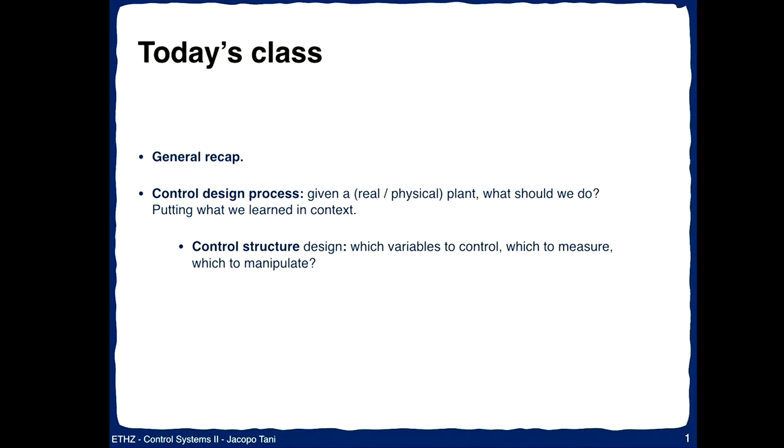So let's start from Adam and Eve. Every good story starts from the beginning. So what have we been doing in control systems? You started after dealing with the basics of math and physics and understanding your way around the basic language of this game. You started studying control systems in the Control Systems 1 class.

And in Control Systems 1, of course, the first stuff you saw was related to how we model systems, in particular how we do linear time invariant, single input, single output systems. You started looking at the fundamental topics of control systems, in particular how to play around with the different signals involved in a feedback control loop.

And you saw the importance of these frequency domain mappings between different signals, these transfer functions. You were told: this is how you derive the transfer functions, this is what they mean, and look at how many interesting properties of the closed loop you can extract from these, from analyzing poles and zeros of specific transfer functions.

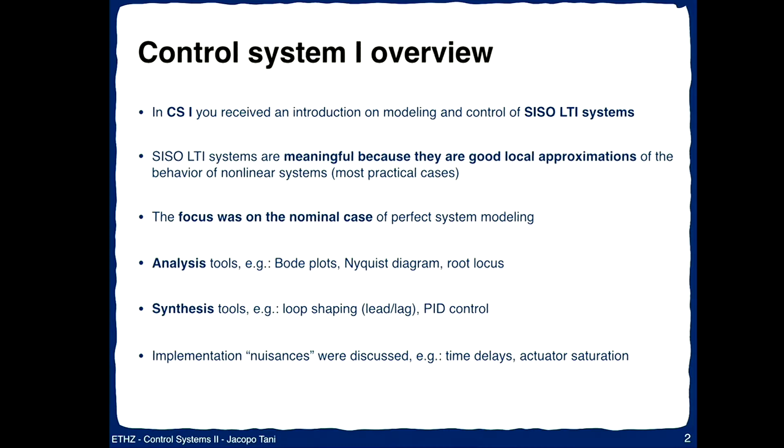And then you were introduced to concepts described as nuisances - things related to implementation. So how do you deal with actually transposing all these concepts that we've learned onto our computer? How do you deal with the natural latencies or time delays that come either from the process or from the implementation? And other things like when you have saturation of actuators, if there are ways to avoid that, like anti-wind-up schemes. So in control systems two, we stepped it a little bit further.

So now we knew what was going on at a fundamental level, and we moved in a couple different directions mainly. First, we extended the domain of analysis, no longer to single input, single output linear time invariant systems, but to MIMO systems - multi-input, multi-output, always linear time invariant systems. It's critical to remember that we're always dealing with linear time invariant systems.

And the other direction we moved in was that of uncertainty. In practical situations, it's actually very tough to know what the model of the plant or process you want to control is, and this is more true the more complex the plant becomes. So when you study MIMO systems, you reasonably think of a more complex plant because you have more channels, more sensors, more actuators, more things going on. And having a reliable mapping between all these inputs and outputs - the transfer function matrix of MIMO systems - is a little bit more complicated.

So in face of this uncertainty, which can be modeled in many different ways - nobody really knows the best way to do it given a specific circumstance, but there are many different uncertainty parameterizations - we introduced this concept and looked a little more in detail at the concept of robustness. So the concept of robustness is: if I design a controller for a nominal plant, will it still work for the perturbed plant, for the uncertain plant? When you have uncertainty, you don't really base your design on one plant, you base it on a family of plants. So how do we deal with guaranteeing stability and performance, the two most important things at the end of the day, when you have this family of plants?

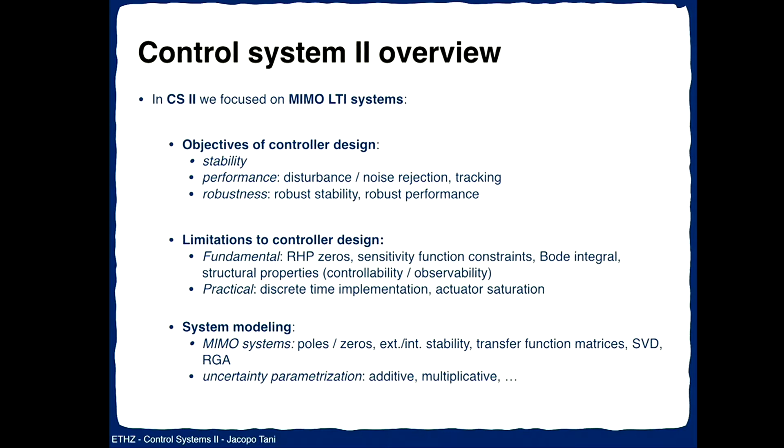And these interactions, there are many ways to characterize them. We introduced some fundamental ways to measure these interactions that we call the relative gain array, and through that we understood that we could have a first hint in which direction to move to go towards synthesizing, for example, a controller.

But before doing that, we went through the usual scheme that we did in Control Systems 1 as well, and we looked at: okay, what does it mean for a MIMO system to have a stable or a performant behavior? How do we analyze this behavior? And we introduced a number of tools, similar to the ones we used in Control Systems 1, in the sense that they eventually go and evaluate and measure the same concepts.

Now, it's all about the sensitivity functions and how the different signals in the loop relate to each other. It's only that when you do MIMO systems, you have more signals, and these signals are a little bit less straightforward. So we had to introduce some different tools like the small gain theorem or these Lyapunov functions to evaluate stability. We had to factor in robustness in some way that might not have been so straightforward.

When we did it, we talked about structured singular values, or these mu parameters, that go and measure how much the uncertainty on the different channels affects the performance of a system.

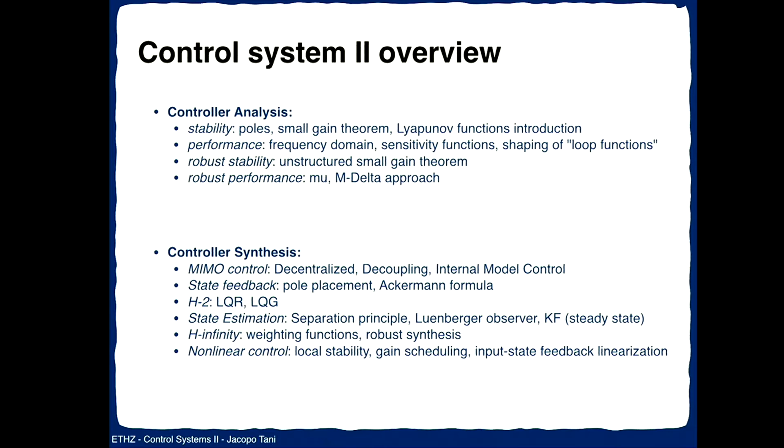In particular, I think a very powerful idea for nonlinear systems is that it always follows the same concept: when you deal with a new problem, the first thing you should try is to reconduce it to an old one. And we saw this concept of feedback linearization, in which, through some particular transformations of the inputs and outputs, you can actually create an inner loop in a nonlinear system that provides a linearized behavior between inputs and outputs without doing any approximation.

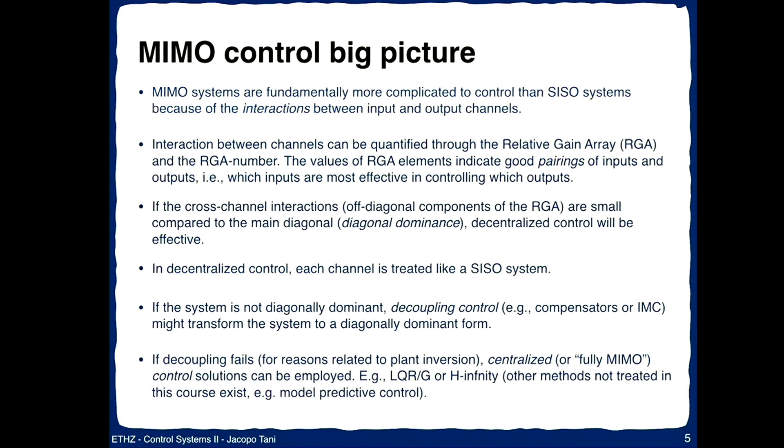And that was really, really nice. So I pretty much talked about all of this already. A quick recap on a little bit more the math.

So what was an LQR? An LQR was based on this idea of creating a cost function. If we have a cost function, we can put whatever we want in it, but we weight different terms. In the regulation problem, which is that of following a zero reference signal, we just look at the controlled outputs that are different from the measured outputs.

Remember that sometimes you get to measure things because of the physical constraints of a system. You have some sensors that you can place only in specific places, and you measure what you measure. But your interest might be different. What you want to control as a designer might not be exactly what you measure. So there's this distinction to be made between the controlled outputs and the measured outputs. And then the input effort is always important.

So why is a linear quadratic regulator powerful? Because, of course, it's optimal in the sense of the cost function.

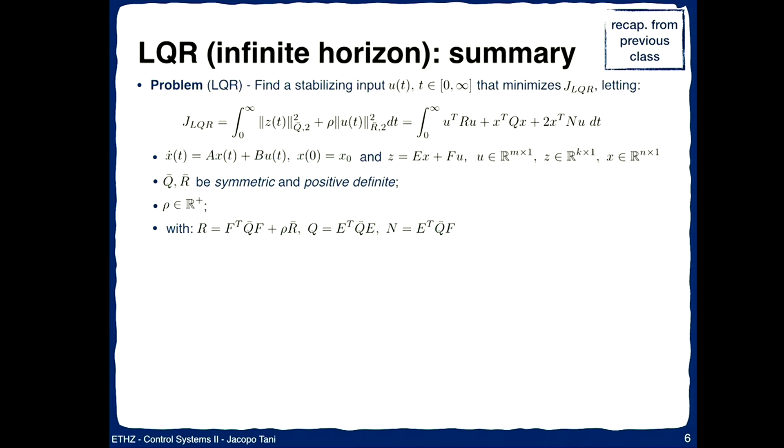We noticed that, additionally, under some simplifying assumptions, this robustness condition holds when one of the terms of the cost function is considered to be zero, that of the mutual interaction between the states and the inputs. In particular, this x transpose n u term here. It's considered always a wise design choice to put that n to zero, so to gain this guarantee on the robustness.

Of course, this desirable property of this LQR approach is that it's easy to tune. It's very similar to PID. Now you have your two knobs, you just play around with them. The designer doesn't really need to worry about if the outcome is something that will send your system unstable, because stability is guaranteed, and so it's a fun approach.

But the problem of the LQR, as I mentioned before, is that of the state. We do not simply have it, it's a very theoretically nice story, but it's not implementable unless we are lucky enough to be controlling a system where we measure actually the states, which is absolutely not the case in general.

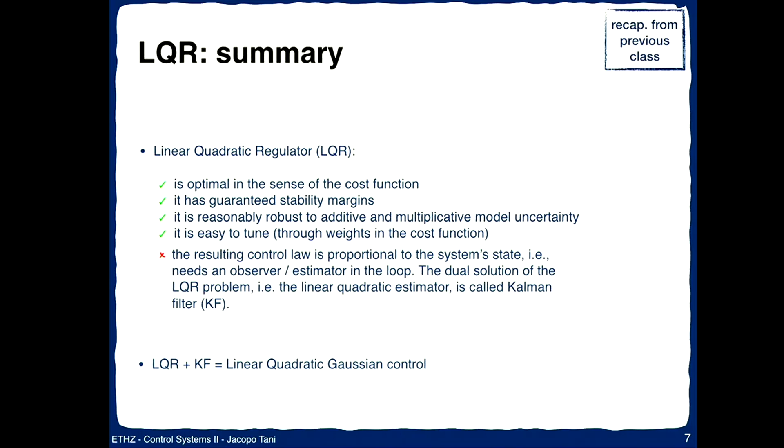So we introduced this concept of estimation. We looked at the first important class of estimators, the so-called Luenberger observers. We mentioned that an observer and estimator are pretty much the same thing. The estimation problem is, in general, a little bit more broad in the sense that the fundamental idea of the problem is...

Let's suppose we have the knowledge of a model of a system. Let's suppose we have the history of the measurements and the inputs. Can we reconstruct the states?

And the question is, can we reconstruct the states when? Do you want the states now at this specific time instant? Do you want the states in the past? Do you want the states in the future? So depending on how you change this detail of the problem formulation, you'll find terminology related to smoothing, if the states you're interested in are the ones in the past, to prediction, if the states you're interested in are the ones in the future, or estimate or filtering, as they're called, if what you want is the states at this current time instant, which is the case of interest to us.

So an observer or a filter are synonyms, and loosely speaking, when you say an estimator, you mean a filter, although estimation technically is a broader term.

So what was the idea of the Luenberger observer? The idea of the Luenberger observer was we need to find the states, we need to find them on the fly, and we create a numerical copy of the system. So what does that mean? It means we just say, because we're sure of the knowledge of the system model, that's a very critical assumption.

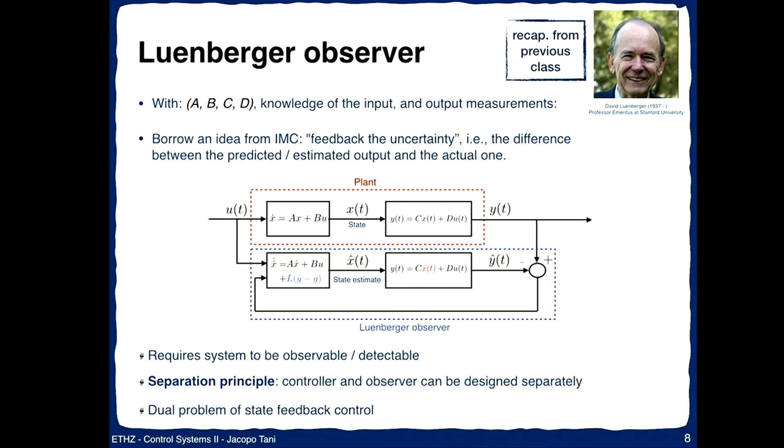So now that we understood there was a way to estimate the state of the systems, how does this fit into fixing our problem with the linear quadratic regulator? How can we use this optimization-based problem formulation, but plugging in a state estimator as well?

By solving the dual problem of linear quadratic regulation, instead of doing a least squares based approach on the control side of things, we did a least squares based approach on the estimation side of things. We found that the optimal solution for estimating a state under some specific conditions, a linear time invariant system with special noise distributions - process and measurement noise that have to be Gaussian and zero mean - the best possible solution you can get under these common, easily verified assumptions is this machinery called the Kalman filter.

We by no means had the opportunity to delve into the actual details of Kalman filters. Kalman filters are one of the strongest possible results of estimation theory, control system theory. They work in practice, they're beautiful. We could do a course only based on that - there are actually courses based only on that, and variations on the theme. I strongly recommend you study Kalman filters in detail, and in general recursive estimation, as you move forward with your studies, because it's an invaluable tool to get things to work.

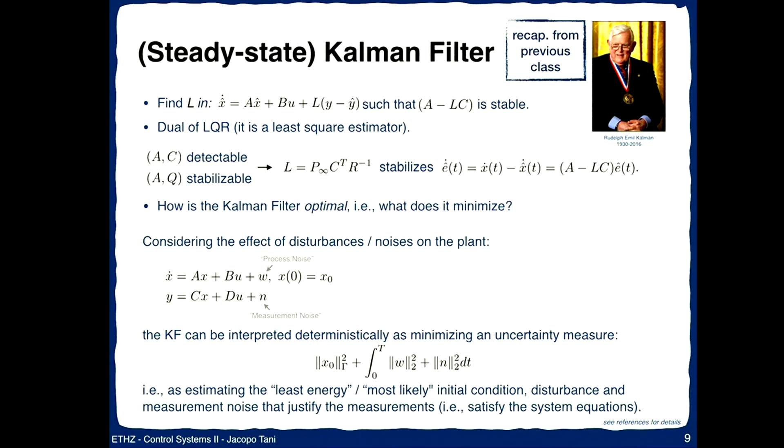So finally, having this regulator, this nice implementable estimator that is even optimal in the sense that it finds the best possible estimate given these assumptions we've mentioned, we can plug it into the linear quadratic regulator implementation, and what do we get? We get the LQG, the linear quadratic Gaussian regulator.

It's linear because it deals with a linear time invariant system. It's quadratic because it solves a cost function that is quadratic. It's Gaussian because Gaussian are the assumptions we're making on the noises that act on the system. So by just putting together these two things, we get LQG.

It's just an LQR in parallel with a Kalman filter. The separation principle applies in the same way. Beautiful, elegant solution. We can design the two things independently, and a Kalman filter is basically a Luenberger observer, has the same structure. It's just that the gain that multiplies the uncertainty fed back to it is different, and it has a specific formulation.

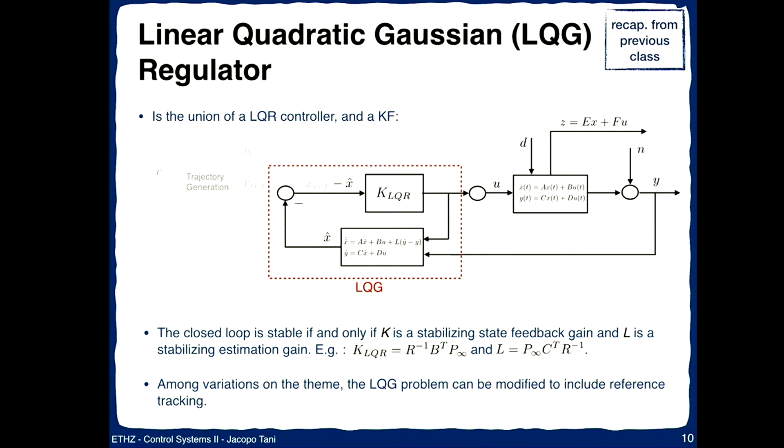I would like to stress, as I did in the notation here, that we talked about the infinite horizon problem. So we just pretended everything was going at steady state, which is the easiest way to deal with the problem. But the big power of these filters is that this whole problem could be posed in a different way, such that the gains are time variant. So at every time instant, you update your gains to get an even better behavior. In order to do that, there are fancy numerical considerations that have to be done. You'll see them in the future, but just keep in mind that this is the easiest way to formulate the problem. It shows what are the key ideas behind it.

So in summary, what can we say about the linear quadratic Gaussian regulator? It's very nice in the sense that it provides, again, an optimal solution. It's implementable in the sense that it automatically generates the information necessary to have this state feedback control.

But the funny thing was that although the linear quadratic regulator on its own was beautiful in the sense it provided great stability margins, and the Kalman filter itself on its own, since it's basically the same thing as a linear quadratic regulator but the dual problem on the estimation side, provides beautiful robustness margins, if you put them together, it turns out that you cannot guarantee robustness. There is no way to prove that if you do something in particular, you'll guaranteed obtain robustness of your controller. And this is not always a problem, in the sense that it might very well work. But in some circumstances, it's a huge deal.

So two things to say here. First, if you ever design an LQG and want to actually use it in your life, test it before you use it. Design it, test it in a pilot plant, in numerical simulations, whatever you want. Perturb the plant as much as you want and understand what the bounds of the functionalities are, and then finally use it.

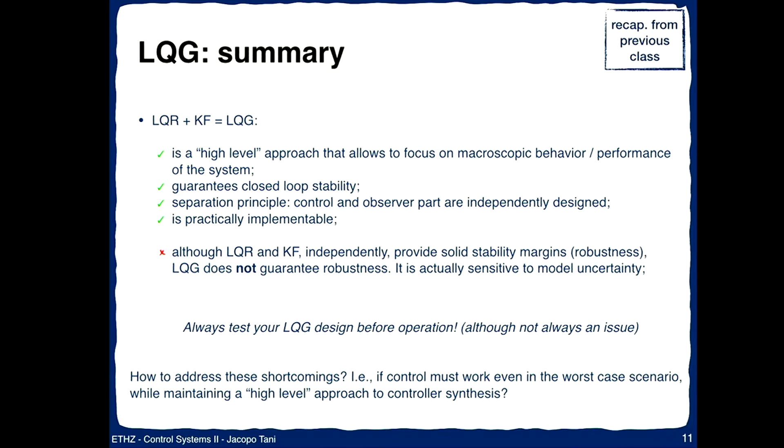So dealing with model uncertainty is a fundamental problem that needs to be addressed. So we asked ourselves, is there a similar mechanism, a similar approach to designing a controller that allows us to focus always on the big picture without delving too much into the weeds of the design process, but at the same time can guarantee robustness of the control system under all possible circumstances, under all possible plants that belong to the uncertainty set. Claudio talked to you about this idea of H infinity control, where the infinity comes from the idea that we're basically solving the same, or at least the framework for the problem formulation is the same as for the LQG. We have a cost function, we have something we want to minimize, and the result just comes out of this minimization approach. But instead of using two norms in the cost function, we use infinity norms.

And we've seen that infinity norms represent the maximum possible value of the biggest singular value of a transfer function over all the frequency domain, right? So we know that singular values are the equivalent, the concept of gain, basically, for a specific input-output direction. And we know that these gains are important to be kept under specific bounds in order to guarantee, for example, stability and performance of a system. And therefore, having a minimization-based approach that relies on evaluating infinity norms of some quantities guarantees that worst-case scenarios are met.

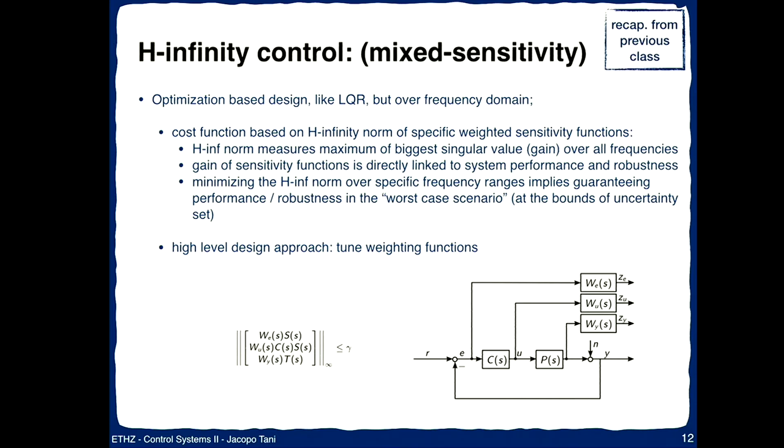So again, the H infinity problem has many variations. The problem can be set in different ways. We looked at the so-called weighted mixed sensitivity approach, where the cost function is the infinity norm of a transfer function that includes different sensitivity functions of the closed loop that are weighted in particular ways. So instead of having the weights as we had before in the time domain in the two-norm cost function, now we have these weighting functions in the frequency domain that are used to shape the sensitivity functions in desirable ways in order to obtain performances and robust stability and robust performance for a system.

So H infinity control works in practice, is based on the same framework of H2 control, so it's based on the same framework of the LQR. It's nice because it's based on, at least the formulation that we presented, recalls a lot of the classical ideas of control, of loop shaping. So it's understandable what is going on. But at the same time, the machinery that goes on behind it, the mathematical passages, are not straightforward. So it's to be treated often as a black box, and one needs to rely on the computer implementation.

So if you remember at the first class, when we showed the Bode integrals, we said, look, at the end of the day, all control systems could be seen as shaping the sensitivity function, taking dirt away from some specific frequency ranges and applying it somewhere else. And these were like old ideas in controls, right? So we went through all this process, through decades of research and then crazy math and stuff, and where did we get to? We got to basically the same thing, but now we're using a very formal synthesis machinery to do the same thing as we were doing before, okay?

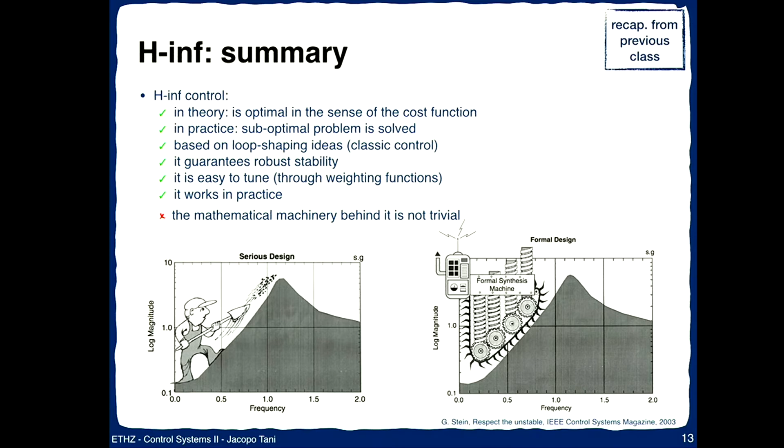It's one of the things you need to be careful of, okay? Math is nice, it's very important, it's beautiful to do proofs. At least it is for me, I guess, maybe not for all of you. But it's important for a control system engineer to remember that the final objective is controlling a physical plant. And it's important to remember that although control systems are not maybe the most shiny of disciplines, with respect to other engineering, like mechanical engineering or aerospace engineering, things like this, you don't get rockets. Nothing would work without control systems, okay? It's like the secret technology behind everything. And if a control system doesn't work, bad things happen. Things explode, people die, bridges fall, shuttles explode, things like this, okay? So it's really, really important, like an act of responsibility, to make sure that you have a feeling with the physical plant and you ensure that the physical system actually works.

So, okay, we did maybe a little bit too long of an introduction on what have we done until now. This was the part where I wanted to address your questions, but since I didn't get many, I'll just go about and say, well, very nice.

We have all of this knowledge now. What are we going to do with it? How does it fit in the bigger picture? So let's say I come to you and give you a plant, a physical system that I want you to design a controller for. How does the whole control design process work? How do the analysis, synthesis, and modeling we've been talking about fit into the control design process?

Suppose you're given a plant. There is a standardized procedure. The first thing you want to do is have a preliminary analysis of your plant and understand what your control objectives are, what the obvious limitations are, and what the objectives are that you want to reach.

The second step is modeling. We haven't stressed modeling a lot in this class, there are specific courses dedicated to system modeling. We've seen that there are different approaches to modeling a system. All models are wrong, in the sense that models are by definition a simplification of reality. And that's good, because as engineers we care to focus on specific aspects, not to describe the truth, whatever that is, of what is actually going on. We want something useful to achieve our goals, previously defined as control objectives.

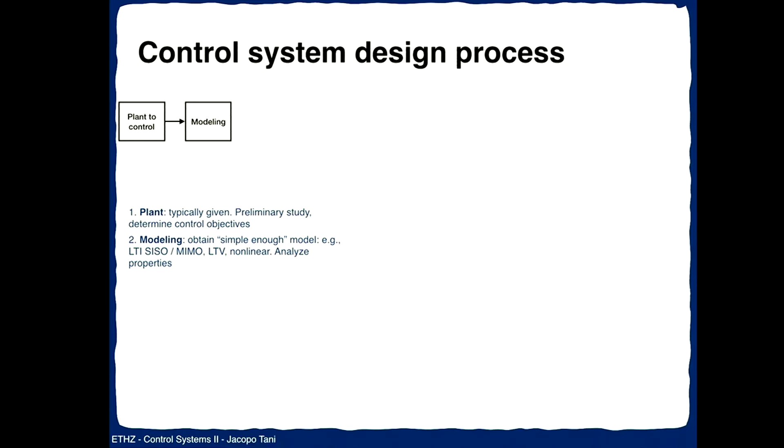So once we have a satisfying model, or what we think is a satisfying model of our system, we can move forward and talk about the control structure. The control structure is about choosing things that we always assume are given.

Now, when you solve your exercises, you're told, take this plant, x dot equals Ax plus Bu. But who chose what is U? Who chose what is Y? Y is the measurement, the one represented by the specific exercise given to you.

If you as an engineer need to handle a plant, you have probably some degree of freedom in deciding which are the measured outputs, which are the controlled outputs, what are the inputs. It really depends on practical things. You have actuators, you have sensors. The sensors you have available, what can they measure? Maybe they can't measure exactly what you want.

Maybe you can choose, maybe you can put a camera instead. Say your control objective is to control the temperature in a room. We could put a thermometer at the center of the room, or an infrared camera at the corner of the room. They both measure temperature, but they're very different. So the process of choosing the best outputs and inputs for a system is not to be taken for granted. There's something to say about this, and we will talk about it a little bit later.

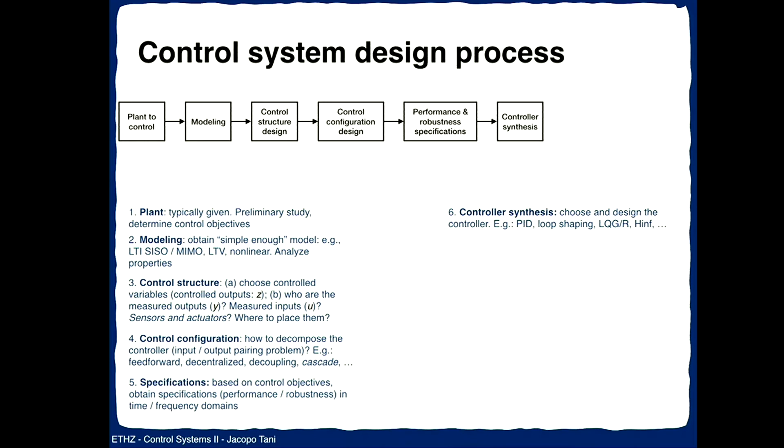And at this point is where you get to choose: do you want to use PID? LQR? Loop shaping with lead-lag networks? A crazy H-infinity control? Model predictive control? Or one of the other 172 control approaches we never even mentioned in this class, and probably you'll never hear of unless you have a career specifically on those things. There are really many different kinds of control solutions that can be used.

So once we've chosen the type of controller and designed it to meet the specifications, the analysis part kicks in. The analysis part was the whole first half of the course. Now we finally have a model of the plant, we finally have a controller—let's check if the specifications are met.

What if they're not met? What if we design our controller with LQG and everything should be fine, but then we try it and it's not robust—it doesn't work across the full spectrum of cases we care about? In that case you have to go back either to your performance specifications or your controller design and reiterate until you're happy. Then you move on and ask, are we ready to go?

No way. The next step is to take this controller you've designed and simulate it—simulate the behavior of the operation. How do you simulate stuff? Either on a computer, or you build a pilot plant and test it there. We have not touched at all on the simulation part of things.

Just a couple words of caution. Simulations are when you basically write a computer program that tries to replicate the model and everything—you can think about MATLAB or Simulink as good tools to do this, but there are plenty of other ones.

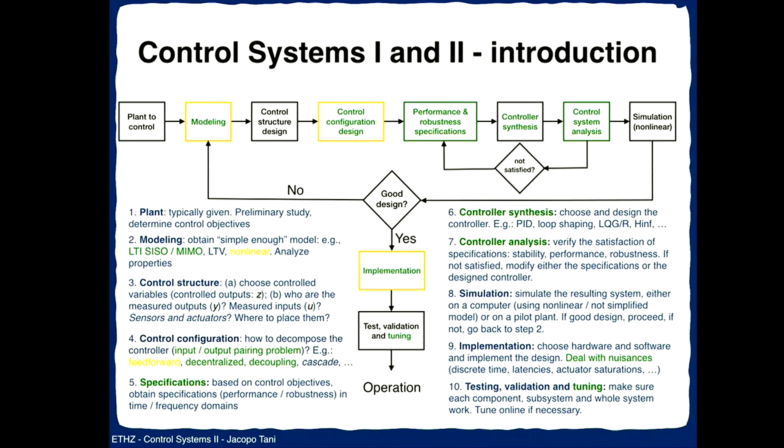So now I will just give you a little bit of an intuition about how to go through the control structure design. So the fundamental question that we're going to address is: how do you choose the control variables?

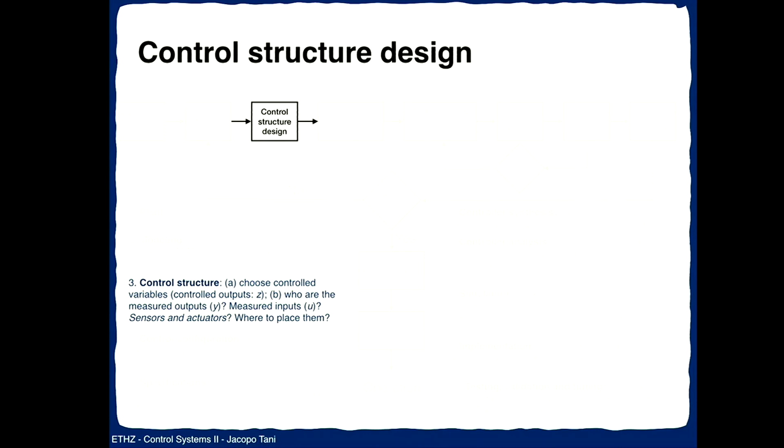How do you choose the measured outputs? And how do you choose the measured inputs? And of course, we won't have time to go into the sensors and actuators because that's another course.

So what is a control variable? A control variable is something that you want to follow a reference trajectory. At the very beginning of this whole process, you decided what your control objectives were, what your final objective, what your task that the system has to follow is.

Up to now, in all the loops that we've designed, you might recognize this. This is the first time that we write the control loop that you've seen a million times up to this point without equations, so it might not look familiar, but it's the same exact thing we've been doing. It's the control, the plant, the feedback, and we understood that we pretty much always want an estimation, a perception module in.

So by the way, I used the bar here to indicate alternative terminology that you might find. The more you go forward, especially in the field of robotics, they tend to use the second word to describe what we use the first word for. So instead of estimation, they would call it perception. Instead of inputs, they would call it commands. Instead of estimate, they would call it a belief. But they're fundamentally the same things.

And we always assumed that the reference signal was given, right? But is that really practical? Imagine a real problem: you have an autonomous car and you're driving it in a city. What's the reference signal? What do you mean about reference signal? It changes, the environment changes. You have to drive, maybe there is a pedestrian crossing the road, there's this and that happening - it's a dynamic process. So the reference by no means can be known before you even start the whole process, right? It cannot be known a priori.

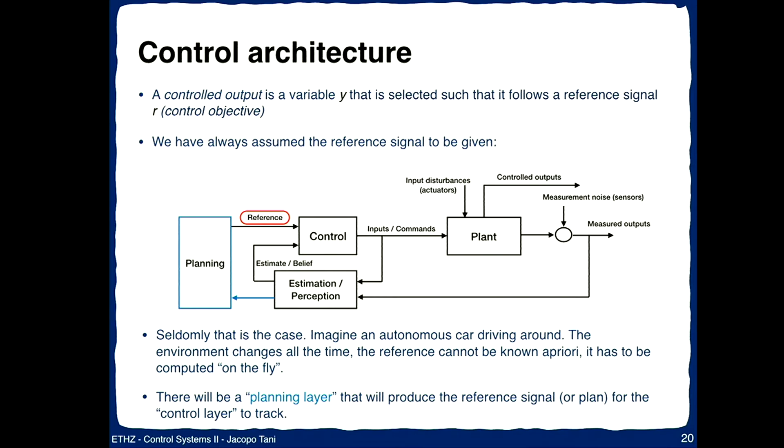And the other layer, which is the one we've been studying in the last two courses, which is the control layer, has really just the task to implement what is the decision-making process of the planner.

And just to give you an idea, when are reference signals easy and when are they less easy? Try to imagine this is a cruise control kind of system. Here it's the easy case - your reference signal is basically go straight, just stay in the lane. That's relatively straightforward.

Now look at this - we are moving in a cluttered, uncertain environment. We have cars parked on the side of the road, we have people crossing the road, we have kids that could start running across the road at any time. It's a much more messy situation. So how do you decide on the fly what is the reference signal that your controller layer should actually implement? Of course, we will not go into details of this because...

Question? Yes, out of curiosity, that on the right, is that already an autonomous vehicle? Yes, yes, and this is, of course, all computer vision based.

The intermediate steps are that you start identifying what different objects are, so you put bounding boxes around them. The red boxes might be obstacles you want to completely avoid, so the reference signal has to be defined on the fly in such a way that you avoid hitting other cars or other people. The green boxes might represent instead information that is useful to you, signals you have to understand that restrict your domain of possibilities - for example, if there is a no right turn sign, it means you can't turn right, something like this. And the green represents just the field of view of the specific sensor.

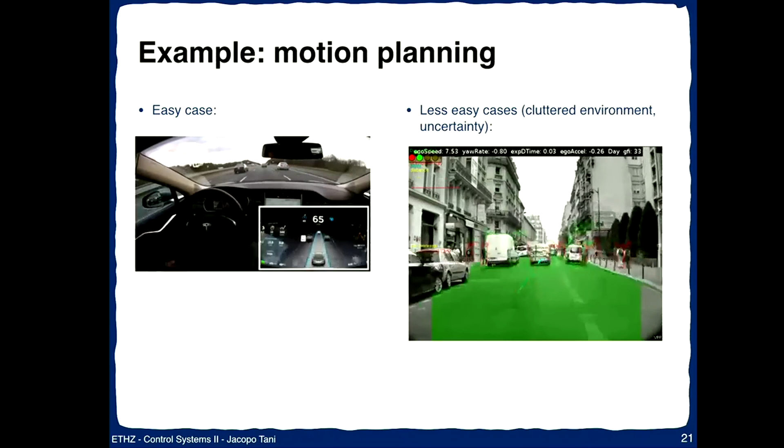This, of course, is some vision-based stuff, but I wouldn't be surprised if there's LiDARs and other sensors involved in the process as well. So without going too much into detail, this is something you'll have a lot of opportunity to get your hands dirty with if you follow, for example, the Duckietown course, Autonomous Mobility on Demand, happening next semester at master level.

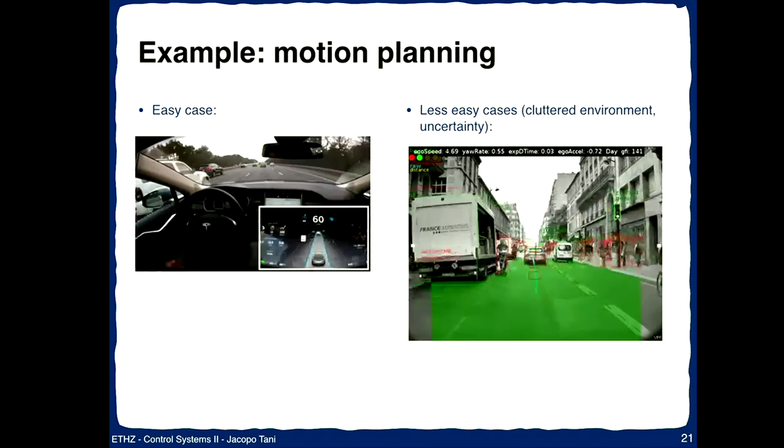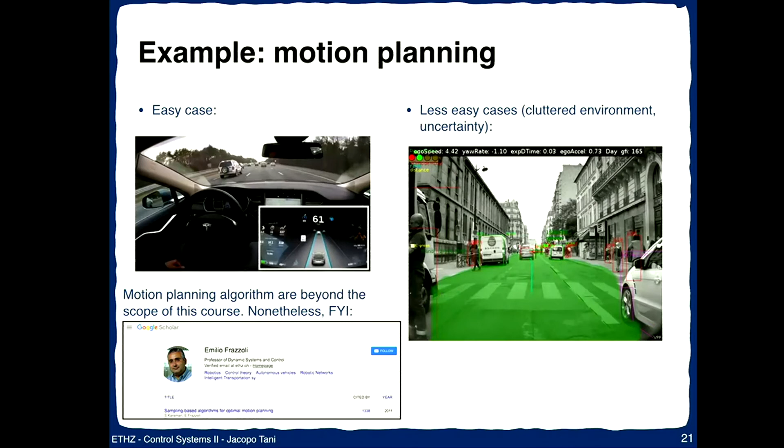Just so you know, Emilio Frazzoli's most cited paper is a sampling-based algorithm for optimal motion planning. This is a real problem, and the professor who should have run this course has his most successful paper exactly on this: how to determine a reference signal on the fly.

I mentioned the motion planner, but there are many other layers. The motion planner could just be this part here, determining what trajectory to follow. But to generalize, we could have other layers, like a behavioral layer, something that tells us that depending on the situation we're in, we have to run a different motion planner or have different control decision-making processes going on.

And even before that, there might be an even bigger picture, with different layers in a control hierarchy. This just goes to say that the reference signal is our control output. Don't forget what the plant is. We're trying to decide what output we want to control given a plant, right? It's the one that follows a reference. The reference is always defined as the output of the previous layer, okay?

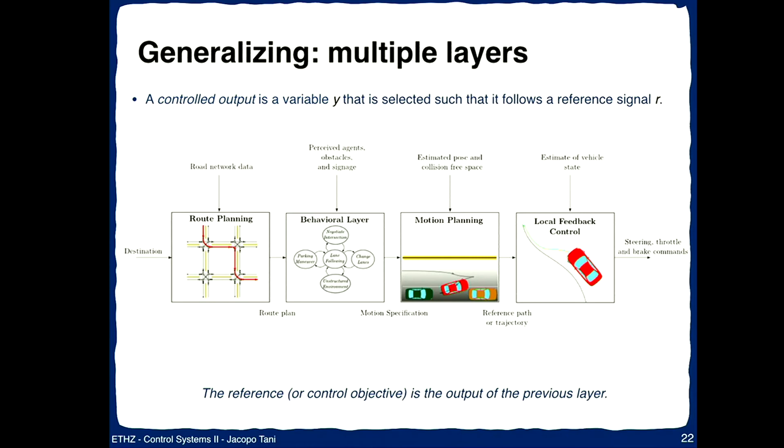And these are real practical problems. A Duckiebot is doing exactly this in the back, and you don't see it. So now let's try to imagine different circumstances. There might be some cases where it's easy, obvious because of the physical setting, what you need to measure based on your control objectives.

Let's say you want to control the temperature in this room. Well, guess what? The objective is controlling the temperature in the room. What do you want to measure? What do you want to control? The temperature in the room. Plug a sensor somewhere, a thermometer. You're measuring at the output, which is the same variable you want to control. It's an easy problem, not much to be said.

Imagine instead that you want to bake a cake. You take your cake, put it in the oven. What is a cake? What is a good cake, right? The control task is getting a good cake. What do you measure of a good cake? How do you measure the goodness of a cake? It's not straightforward, it's not obvious. What is the relationship between the controlled outputs, the measured outputs, and the final objective you want to reach?

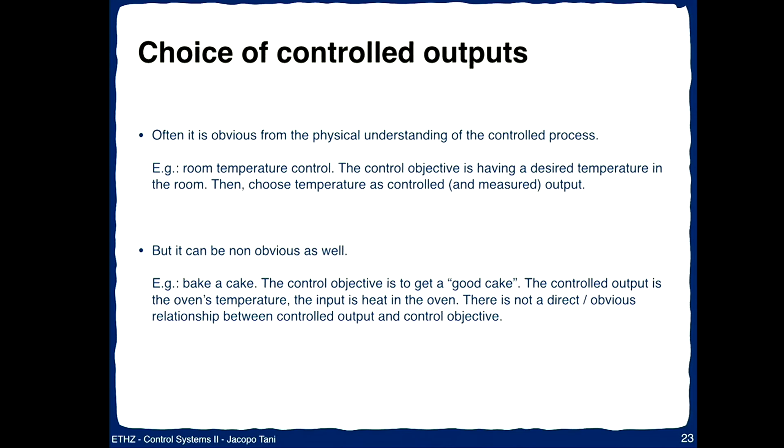So how do you go about making this choice? Is there a standardized method? The key idea behind this, which is powerful and may come up years from now if you choose the research route—hopefully the problem will have been solved by then—is that you choose a control output such that, supposing you already have the input selected as well, you maximize the satisfaction of a specific task. So it's all based on your final objective: you have a well-defined final objective, then you go backwards and make your design choices in such a way that you maximize your final task.

So under a bunch of simplifying assumptions, the idea here is just to give very high-level guidelines, not proving anything. Suppose we have a system, a relationship between inputs and outputs, that evolves fast enough that we can ignore the dynamics and just pretend it's always at steady state. This is a good approximation, for example, when dealing with Duckiebots: you have electric motors, DC motors, which are what actually move things around. Once you provide the voltage, the DC motor goes to steady state almost immediately compared to the dynamics of the system. So you can neglect the dynamics and consider the input-output relationship as static, where there is some gain G, a steady state gain relating inputs and outputs. So suppose you have this relationship.

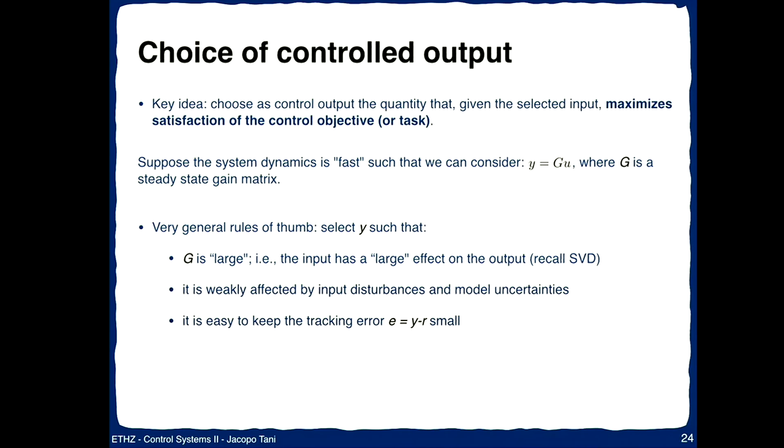Just to give you an idea of how to formalize this process a little bit, this is not meant to be rigorous. Suppose your control objective is getting a cake to be good, right? Well, we can't measure goodness of a cake, but we can create a scale from 1 to 10, and let's say that 10 is the perfect cake.

It's a cake that is crunchy on the outside, soft on the inside, cooked but not burnt, perfect, and everybody likes it. And let's instead define 1 as the cake that is completely burned, where the control objective of getting a good cake is failed for all means and purposes.

Well, then we can create a cost function, an objective function that we want to minimize. Why? Because we're good at minimizing things, we have the math for doing that. So once you have your quality cake scale, you can just put a minus in front of it, and now maximizing the quality of the cake means minimizing the opposite of the quality of the cake. It's just a trick.

So suppose that there exists an optimal input. Consider inputs and outputs are related by that G relationship we said before. So if we find the input, we are implicitly finding the output as well. Suppose that there exists an optimal input that provides the best possible cake ever, like a 10 on the cake quality scale.

Then you can set the problem of finding the output to control as that of finding the input that gives you the best optimal cake metric. And the metric, of course, you can define it as you want. So this is a very general approach.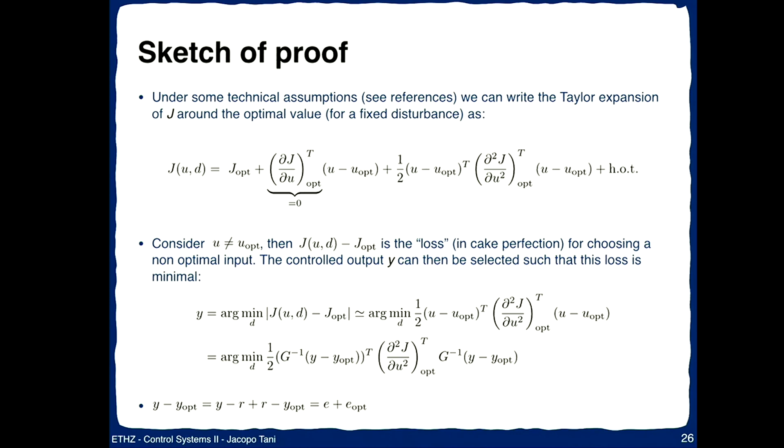So without getting too much into the details, the idea is: how do you choose your controlled outputs? First, define what your final objective is—you've got a task you want to achieve, a final goal. Based on that goal, you step back, make assumptions on the dynamics, the relationship between inputs and outputs, and use a formalized approach to determine what your outputs are.

What about the inputs and the measurements instead? Is there a formalized approach to choose the best inputs and best measurements? Any comments, questions, or doubts? I got a question—why is it minus C and not just plus C?

Because C is the cake quality, and higher values mean better. We like to minimize instead of maximize, so if I want to pose the problem as a minimization problem, I define the inverse of it. If I minimize the inverse, I'm actually maximizing the rest—it's just a mathematical trick.

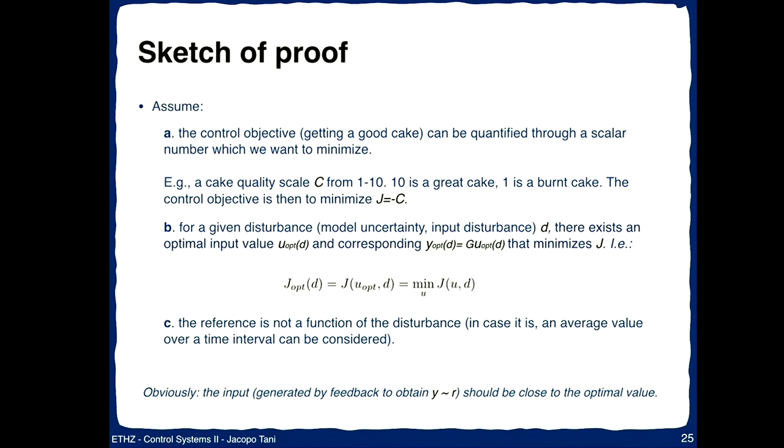So how do you choose measured outputs and inputs? Well, for measured outputs, these are really just general guidelines. You want something that has a strong relationship with the controlled output—ideally it's the same, like the example of temperature in the room. If you can measure directly what you control, that's the optimal scenario.

Since you want to do disturbance rejection or noise attenuation, you might want to be able to measure things that can detect the appearance of the disturbance as quickly as possible, so that your control system is able to compensate.

Most importantly, we saw the profound implications of observability and detectability on determining state estimates and therefore implementing efficient controllers. You want to make sure that when you measure stuff, you're addressing the problem of observability. Don't measure quantities that make your variables of interest unobservable, otherwise you'll have problems, especially if there are unstable modes in your plant. The minimum you have to do is choose your measured outputs such that the system is detectable, so you can stabilize the unstable modes.

Similar considerations apply for the inputs. You want inputs that have a large effect on outputs, the same thing we said before. You want inputs such that the system is reachable, especially if your open loop plant is unstable—the first objective of a controller is stabilizing the plant. If you choose inputs that poke the system in places where you can't actually reach the unstable modes, there's nothing you can do—you failed before you even started.

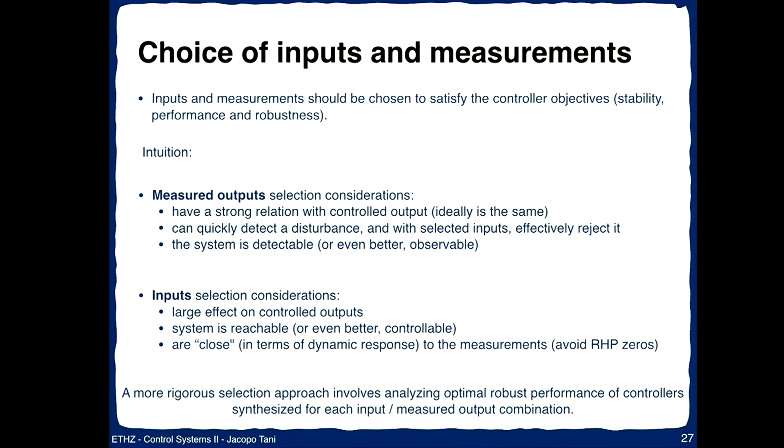So I'm nearly done. I guess I wanted to give you extra minutes, but instead it didn't happen. Oh no. So now we've talked a little bit about most of the things that are going on here. I have one slide left.

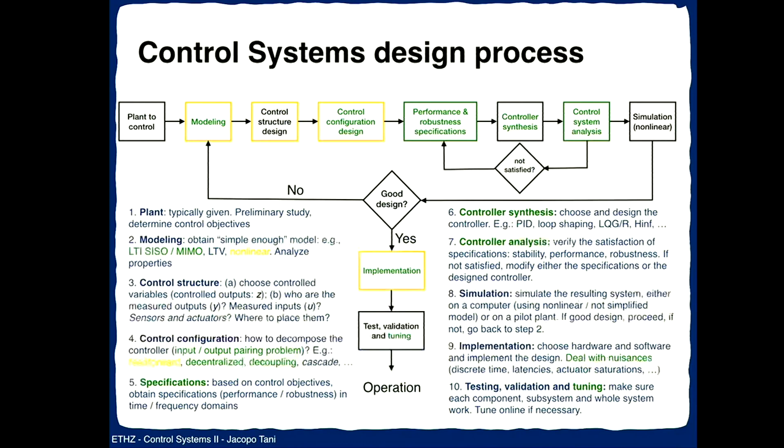Please be patient. What are the gaps in knowledge? What are the next steps? So you have to sit in other courses. I'm sorry, you don't become a control engineer with 2 courses. You need more stuff under your belt.

In particular, I can't stress it enough, you need laboratory experience, embedded systems, deal with hardware, deal with software, code stuff, sit in labs, take all the possible experience you can with direct hardware, because the devil is in the details. You'll realize how many details are relevant to specific plants.

System modeling: all the different trade-offs between choosing different ways of describing mathematically physical phenomena. What about linear time variant, SISO, MIMO systems? What about different families of nonlinear systems? We did all of this with deterministic formulations, okay?

You could rewrite this whole course based on probabilistic definitions. Given an input, X doesn't represent the position of your system, it represents the probability that the position is at that point. Everything changes. You could rewrite this whole thing just from a stochastic perspective. That is actually effective—the most you go forward, all the Duckiebot stuff is based on stochastic representations.

As far as controller synthesis goes, we have described some controllers. There are many more. Optimal control is a full field, plenty to say. Model predictive control is incredibly useful, incredibly practical. There's a dedicated course sitting in that as well.

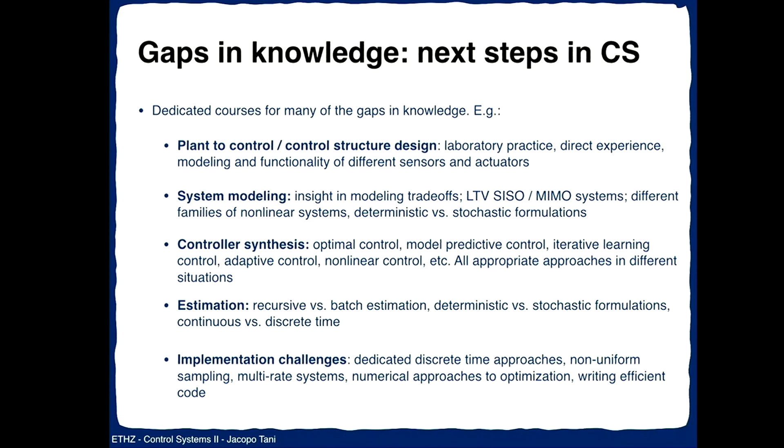So if you have to remember 5 things out of this course, what do you want to remember? MIMO systems are challenging because of interactions, okay? But fundamentally, it's the same thing going on in a more interactive way.

All models are wrong, but some are useful, okay? When you model stuff, you never get it right. There's always the problem of robustness. There's always the problem of model uncertainty, and that's a make or break deal when things actually work or not. So be careful of model uncertainty and address the robustness problem.

State feedback, it's very powerful, opens a can of worms. Estimation, deal with it—you can't survive without knowing more about estimation.

There are complex mathematical machineries. We saw all the big machines there, but at the end of the day, we're always doing the same thing. We're always shaping sensitivity functions, because that's the fundamental truth that's going on in a control system.

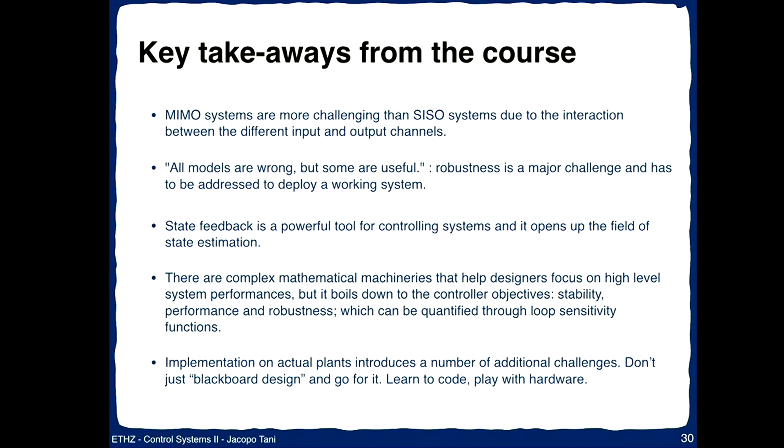And finally, there's lots of mess going on the implementation side of things. So don't just do things at the blackboard, but play around with hardware. Thank you very much.